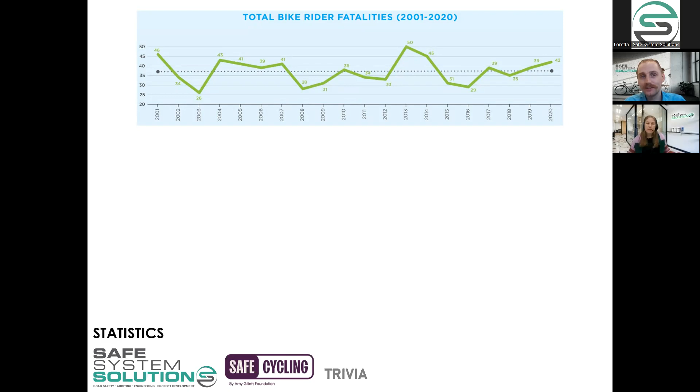I just wanted to share some trauma statistics for riders, so we've got context of the size of the issue. The first graph shows the past 20 years measuring riders who have lost their life on our road network. Although there are some peaks and troughs, this dotted line represents the gradient, or where things are heading. You can see it's relatively flat, so we're not seeing a trend line.

Thank you very much, David, that's exactly what I was after. Prize to David, the trend line is relatively flat. It's indicating we're not really heading in the direction we would like, which is obviously aiming towards zero, trying to ensure we're reducing those figures. It's more or less hovering around 40 cyclists per year killed on our transport network across Australia.

If we do a bit more analysis and compare that to cycling volumes per capita, relative to the population at that specific period, we do see the trend line showing a little bit more of a downward trend. However, we're not achieving the same benefit as we're seeing with vehicle fatalities.

Another way you could interpret this is that the changes we've made on the transport network appear to be doing good things for reducing fatalities for those in vehicles, and to a lesser extent we're helping our cycling community. So we're not at the same level of reduction for both modes, and there is more work to be done within the cycling area.

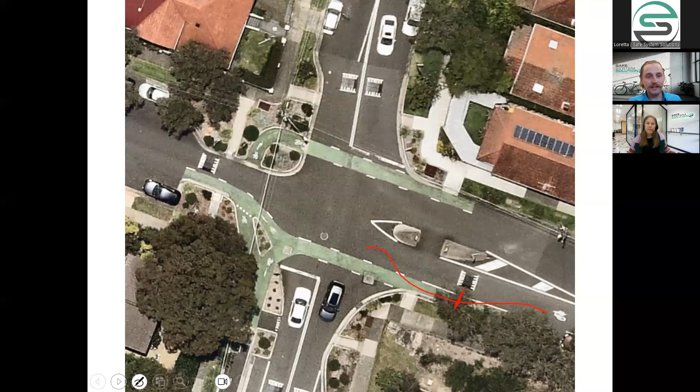Okay, we'll get stuck into some content now. And today's focus is all going to be on roundabouts.

We could have included the roundabouts discussion as part of our previous module, because that was intersections, and a roundabout is an intersection form. But we've deliberately decided to make this its own separate module because there are very specific concerns and risks associated with roundabouts that are really worth exploring, and we want to make sure everyone is comfortable and acknowledges what those risks are.

So we're going through all different types of roundabouts today. There's no Wally for today, so don't need to be stressed about looking out for Wally. He's not going to pop up in today's slides, but we will have an assignment. I'll go through that coursework at the end of the module, but you don't need to worry about our friend Wally for today.

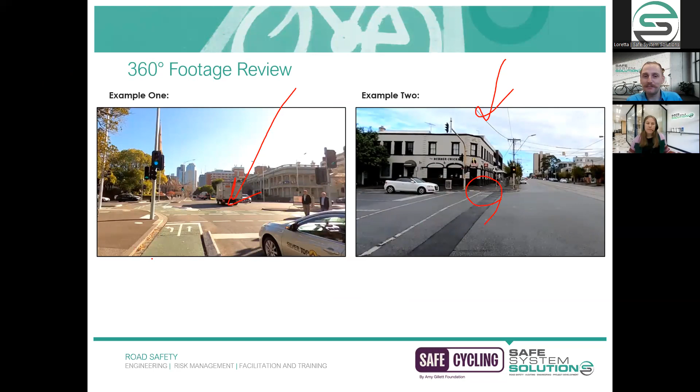We provided two different examples here of intersections and riding through intersections and performing right turn movements. In example one, you would have had an experience of riding through the protected intersection, and example two, just a more conventional intersection, although it does feature those hook turn boxes. Hopefully you managed to have a look at both of those examples, and we'd love to hear your feedback in the chat. If you did feel that safety benefit associated with the protected intersection, we'd love to hear your thoughts on it.

We are going to have a very similar agenda as what we did with the intersections, where we're going to talk about this idea of a protected roundabout. Previously it was protected intersections, now it's protected roundabouts. We'll talk about exactly what the design features are associated with the protected roundabout. We'll look at some international examples, then focus on something a bit closer to home and have a look at Melbourne's protected roundabout. Then we will have a chat through, well, what about multi-lane roundabouts? Because protected roundabouts are generally installed with single lane approaches, single lane in the circulatory area, so how do we manage cycling connectivity and safety within multi-lane roundabouts? And finally, we'll have a chat about local roundabouts as well.

Although this document is a little bit old now, 2016, Vic Roads, or Department of Transport and Planning, have produced quite a good tool within this space, which is the guidance on bicycle and pedestrian treatments at roundabouts. Other jurisdictions have similar papers, but we will be referring to that as part of today's discussion. Similarly, Austroads have also produced their own research report, which is bicycle safety at roundabouts.

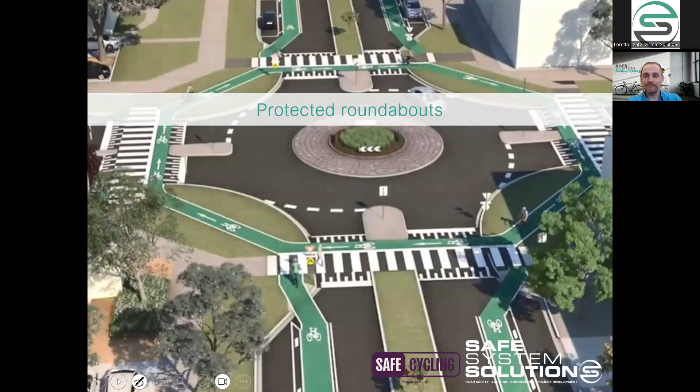So protected roundabouts look something like this. This is an artistic rendition of Melbourne's protected roundabout. We'll go into all the features in a few moments' time, but what I'd first like you to just comprehend at this stage is we're not forcing riders into the circulating area. The circulating area is just where vehicles travel, that's the part of the carriageway, the round part. We're not bringing riders into that space because it's very, very hard to be able to manage that interaction safely unless it's very, very low speeds.

So this is an example of Melbourne's protected roundabouts, and riders are instead offered the opportunity to basically have an off-road facility that passes adjacent to that circulating area. So they don't need to worry about going into that area at all, and they've got their own separate facility. What's also really exciting about Melbourne's edition is all of the conflict point areas on each leg are raised up. I've already spoken to why we like those raised features so much, because they really highlight that this is a priority crossing for pedestrians and for riders.

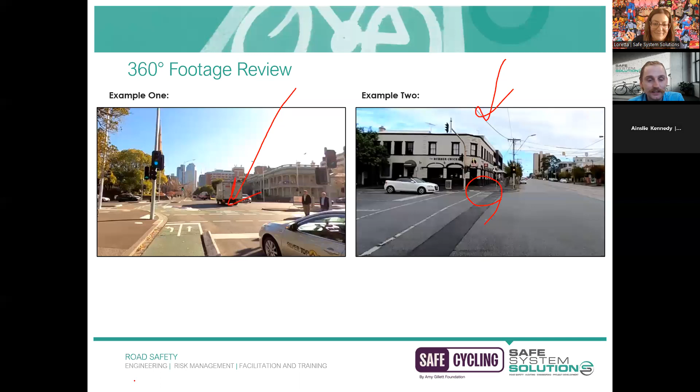Oh yes, okay, thank you very much Loretta, and thank you for sharing in the chat. We'll give a prize out there. Well spotted, there was a vehicle mounting the curb.

That occurred as we were conducting the video for module 3. If you haven't seen it, make sure you're not just watching the presenter, turn the camera around and have a look at how traffic is interacting. It's not an uncommon thing to occur, and in a perfect world you would have those incidents really minimized.

I can say that this feature has been struck multiple times, both by turning vehicles and by riders. There was an incident where a rider just thought this was a conventional intersection, wanted to go straight through, but did collide with the corner refuge island and broke their arm.

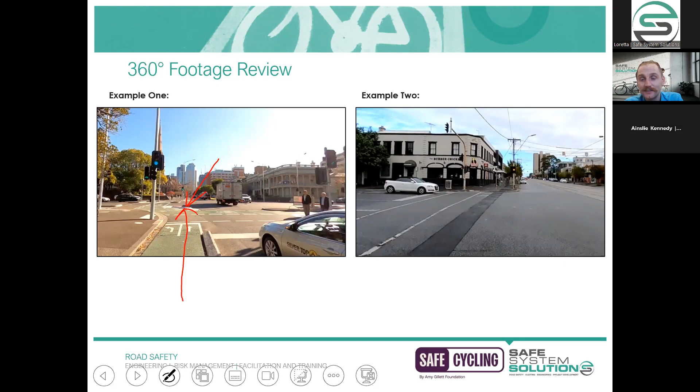The immediate response to mitigate that risk was to install the RRPMs, raised reflective pavement markers, or the cat's eyes. They were just glued on there, half a dozen or so, just to help raise that awareness, because it kind of blends in with the surrounding area.

But it's just one of those things where, in a perfect world, you'd make it as contrasting as possible to really delineate that this is a raised feature and not to collide with that.

The other option would be, and it's probably not always feasible, whether a barrier curb could be installed on the driving side to once again mitigate that risk of entry onto the corner refuge island. But it may not be achievable, given that sometimes it needs to be mountable if you've got heavy vehicles and things like that.

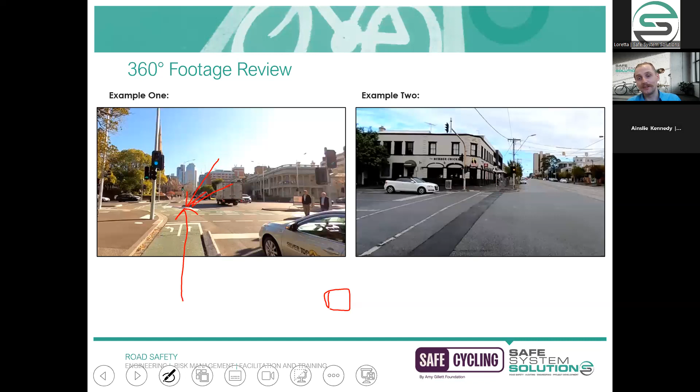So it's a good pickup, and I wish I had a better explanation or solution within that space, but it's more or less part of how these things operate. The takeaway is to try to make it as obvious as possible, and also make sure your lighting is suitable, so in low light conditions it's clearly visible for everyone.

But Loretta, if you don't mind, launching the poll.

In this little diagram, we've got three cyclists within the roundabout. Cyclist A there, cyclist B just adjacent the splitter island, and cyclist C within the roundabout. The question is, which cyclist do you believe is most at risk? We'll give you 30 seconds to fill that out. Final reminder that these polls are not marked or recorded, so they're anonymous. Don't get too stressed if you're not 100% sure, just pop in an answer that you think is correct.

All right, we'll give you five more seconds, so fill in your answer. 3, 2, 1, and we'll end the poll there, and we can share the results.

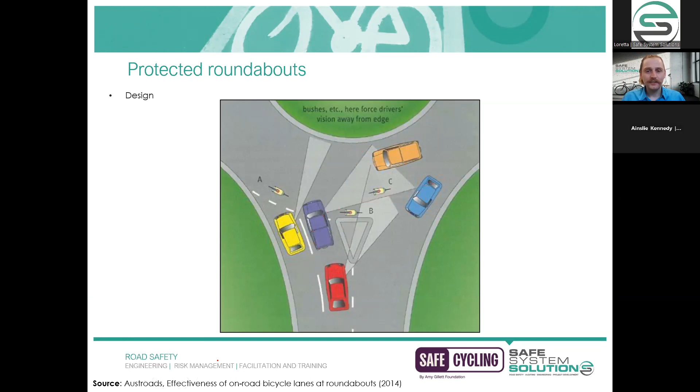And finally, rider C, there's a few areas where this could be an issue. If we go back in time just a moment, you can clearly identify that vehicles exiting could have a conflict point with that rider. But also it comes back to that yellow vehicle decision they may make, where if they see the vehicle adjacent them going, they may go out automatically.

So hypothetically, the purple vehicle stops at the last second because they see rider C and they manage to brake in time. Rider C continues going, but the yellow vehicle has just made the decision, well, I've seen the purple vehicle go, so I'm going to go as well. And that's where you get that collision. So all of them are pretty valid answers and all of them have their risks.

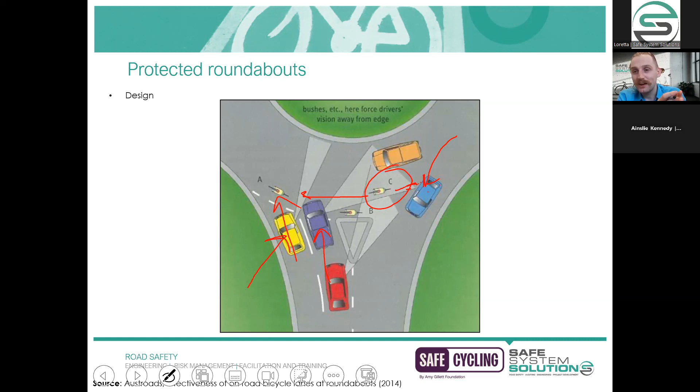And this is a diagram just to highlight that basically every situation of the roundabout, there are pretty significant concerns if you're a rider.

Now, a few years ago, 10 years ago actually now, Austroads had a look at the data for crashes that have occurred between a vehicle and a cyclist within roundabouts. And as part of this analysis, they categorized what are the different crash types or the movements occurring for that collision to have occurred. So I'll just go around the roundabout and chat through what are the most common crash types that we're seeing.

So the red arrow within this diagram, which has got a full line, that represents the vehicle. And then the dotted light green arrow, that is the bike rider. So 68%, which is the majority, is entering motor vehicles versus circulating cyclists. So that's riders that are already within the roundabout and motor vehicles failing to yield to them. It's generally that idea of looking but failing to see. So not giving way to riders who are already within the roundabout was seen as the largest source of trauma for the crash types that were categorized.

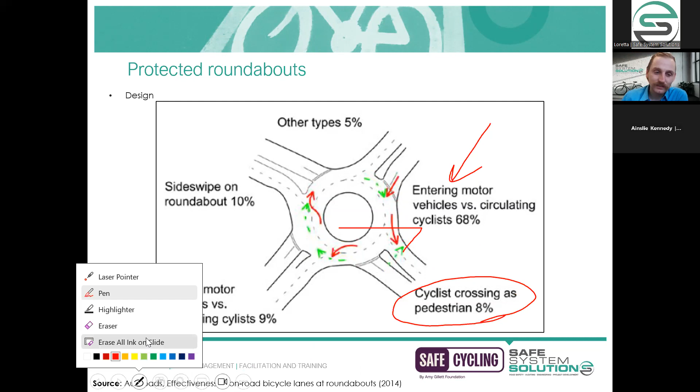If they're crossing in this direction, you can also have issues of sightline obstructions. There could be vegetation and things that's been installed here. And you may not have that ability to be able to see those exiting vehicles as you go to attempt to cross that leg. So it's about 8% that we're seeing there.

This one always catches me by surprise, which is exiting motor vehicles versus circulating cyclists, which is 9%. And the reason I say I'm surprised is because anecdotally, if I were to say what is the most stressful part of the roundabout, it's this collision.

It's if you were riding in a roundabout and let's say you were turning right. Whenever I'm in that position, particularly multi-lane, what I'm most nervous about is that vehicle that's exiting and whether they will recognize me as not going through there, but in fact turning right across the lane. So super, super stressful.

But interestingly, the statistics don't necessarily say that that's the highest level of trauma that's occurring. It's around the 9%, and instead the entering motor vehicles is the highest. So it's also good to have that data to, I guess, limit your bias and your own anecdotal evidence, and instead focus on what does history show us.

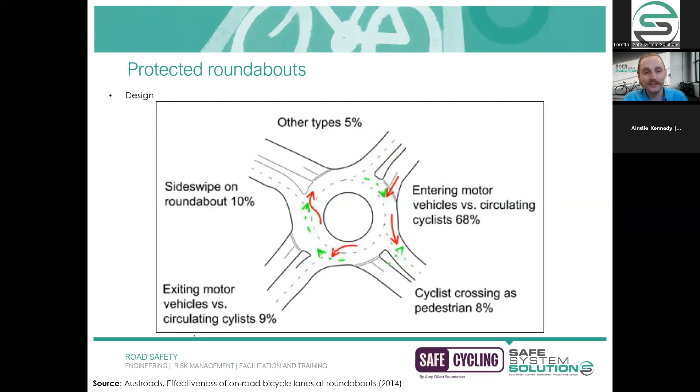So some good lessons to be learned there. The final 10% is sideswipe within the roundabout. It's basically just vehicles straying into the bicycle lane or failing to maintain their traffic lane, and then having that clipping collision with a rider. And then a further 5% which was unidentified because perhaps the collision wasn't quite clear within the police report.

So that is how most of our roundabouts operate. And basically, any which way you look at it, there's going to be risks at the entry legs, the exit legs, the circulating area. So protected roundabouts try and simplify all of that and make it a lot safer for riders.

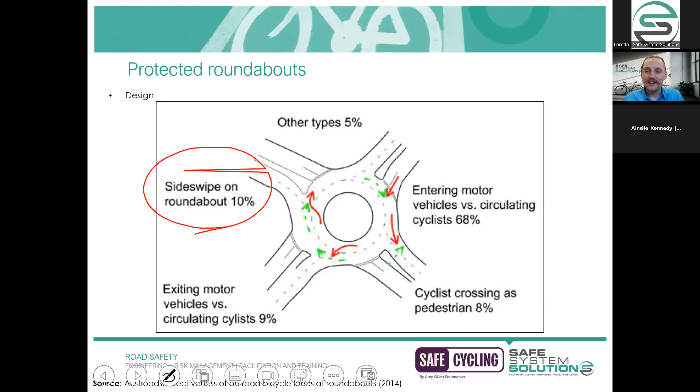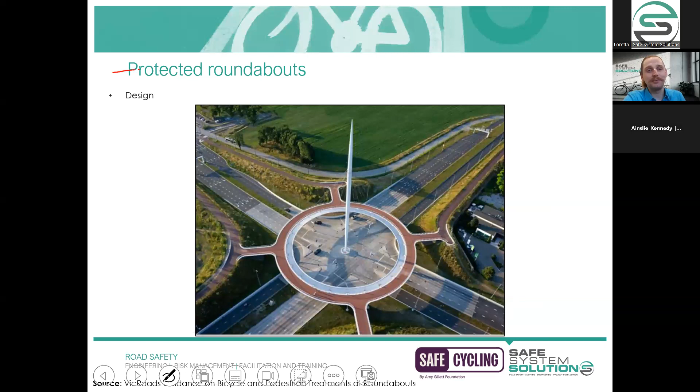Now, this is an example of grade separation. It's not an example of a protected roundabout. It is in the Netherlands, of course. It's called the Hovenring. It's just a reminder that if you're actually doing any high-speed interactions, it's very difficult to manage conflicts with vehicles, because you're just not going to be able to get the impact speeds low enough for those to be survivable.

And it's also pretty unexpected for vehicles in those high-speed environments to be able to yield to any riders. So yeah, anyway, in the Netherlands, they decided, well, we're not going to bother putting riders down there on the carriageway level. We're just going to grade separate. You could also go the other way and tunnel. But yeah, basically, it's not a good idea to just assume that everything can work at grade and it'll be all hunky-dory. Instead, you can look at this as an idea.

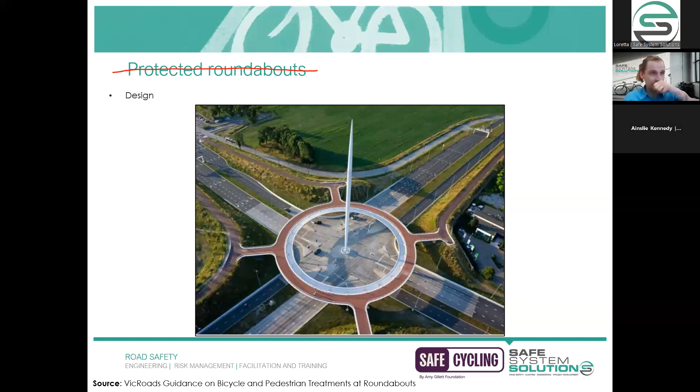That's just another photo of it. So just to confirm, you've got all your vehicle traffic on the carriageway level there, and then all your riders and pedestrians, they get to use this elevated structure, so they don't have to deal with any of that traffic.

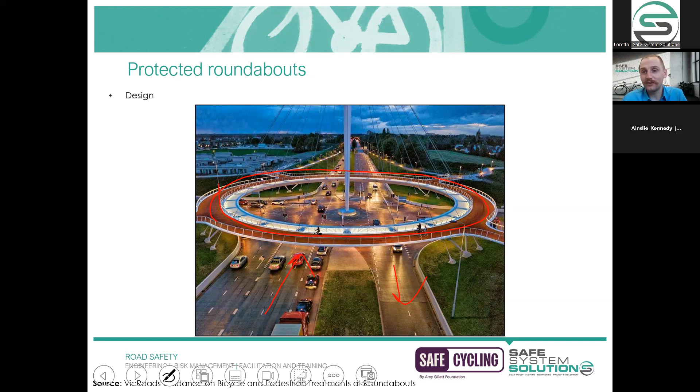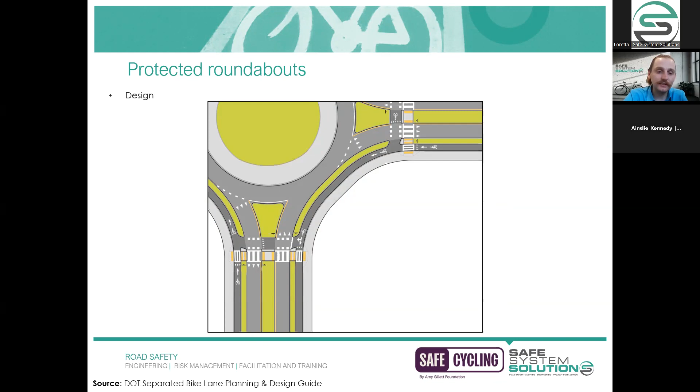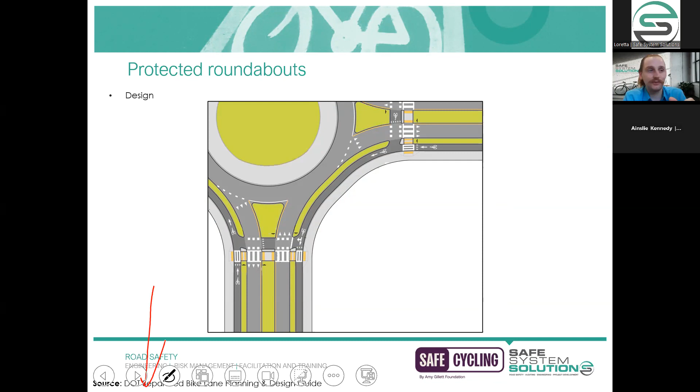All right, we'll have a look at our protected roundabouts now. And once again, the resource that we are using is going to be from an American source. So I've flipped everything over, and there's a few terminology issues that I'm just going to have to translate, because it's just not how we would use certain words or different jargon, but the principles are still very much the same and absolutely transferable. So don't get too concerned about things like that.

So we've got some key features that we need to look out for as part of designing a protected roundabout. And as I alluded to at the start, priority is we're not going to bring riders into the circulating area. Instead, we're going to provide them an offset away from that space so that they don't have to deal with the conflicts close to that circulating area.

So the circulating area there and the conflict point has been offset from there. Okay, so that's really the most critical feature. And figure number 1 is just showing that, yep, we've got a bicycle crossing that's clearly offset from that circulating area. We've got some yield lines, so that's number 2.

Those are the shark's teeth, which is used in North America. It's also used in parts of Europe. We wouldn't use that line marking. We would use give way line marking and also have a give way sign. But that clearly articulates that motorists, you need to slow down and give way as you're exiting or entering this roundabout to pedestrians and to riders. So it's giving that priority to vulnerable road users.

So that's the general premise of what we're looking at for protected roundabouts. I find it's always much easier to talk to actual examples, so we'll have a look at the Netherlands here. This is in Assen, an example of a protected roundabout with quite a large footprint. You can see this is not an urban area, and there happens to be quite a lot of space to play with.

And you're able to achieve quite a large offset. By offset, I just mean where the riders are crossing and where the edge of the circulating area is. I'll keep referring to that as the offset. It's pretty big there. You probably won't be able to get that space requirement in a lot of the sites you'd be looking at, just because in built-up areas we don't have this much land available.

So just to confirm how this works, and the reason we're promoting this: if you're a bike rider riding and you want to turn right, as an example, like this, the first thing is you've got priority across all of those legs. So it's a much more attractive and convenient ride, because you don't have to slow down and stop and give way, then slow down, stop and give way again. It's just a more convenient and easier type of journey.

Here's what it looks like out on the ground.

Ainsley, you got a question? Yes, Max, we have just received a question.

If you have any comments about some of the signage for cars to give way to the cyclists - I know at some of these locations there might be some pedestrian crossing signage. Is there any for cyclists specifically though?

Good question, we'll give a prize out there. And the answer is it's very jurisdiction specific.

So depending on which part of the country you're calling in from, you may do things a little bit differently. Within Victoria here, the way that we would do it is we'd have a give way sign, and then underneath it, a supplementary panel which has just got a symbolic person and a symbolic bicycle - that's pretty bad drawing, but you get the idea. So that's kind of how we manage it in Victoria. Other jurisdictions don't have those panels and they do slightly different things. But probably get in touch with your state road authority for more info on how that could be adequately signed.

Perfect, thank you, Max. Thank you, Ainsley.

Loretta, another question while I've got you. Referring to the previous slide, just out of curiosity, on the left-hand side there's no zebra markings on the bottom left crossing. Any reason for that? I've looked at this site dozens of times and never noticed that. That is very good eyesight. I had no idea why that would be the case, actually. That's very unusual. I don't know why. Really strange - you'd expect all of those legs to have a consistent treatment applied, but there's no zebra there. Is that the photo? No, that isn't the photo, that's a different leg.

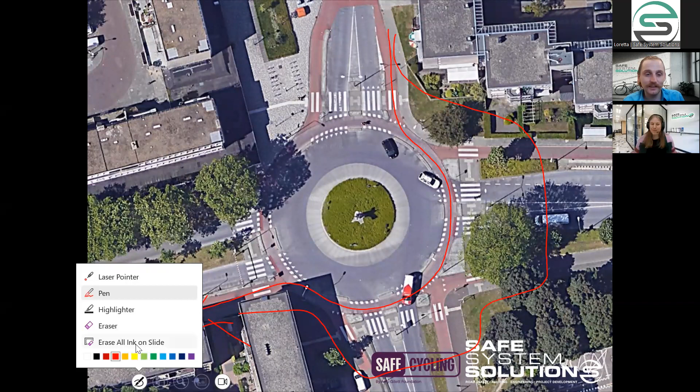However, the limitation we need to be aware of is because we're not achieving that offset, when we have vehicles exiting, they don't really have those sight lines that we like to see. It's actually perfectly illustrated in this aerial image, whereby you can see that white vehicle exiting the roundabout, and you can also see there's a rider within that outer ring. As they're traveling around here, you can appreciate that if you were driving that white vehicle, it's practically impossible for you to see that rider who is on your near side, right behind you - likely not in your wing mirrors and likely not in your rear view mirror. So they're effectively hidden, which is not a great design outcome.

I wanted to provide another example, this one in Fendon Road, Cambridge, in the UK. I like that they've got this outer ring for the riders, similar to our second example, because just having that ring concept, one smooth radius, is a lot more comfortable to ride in. It feels a bit better than having to do lots of little turns.

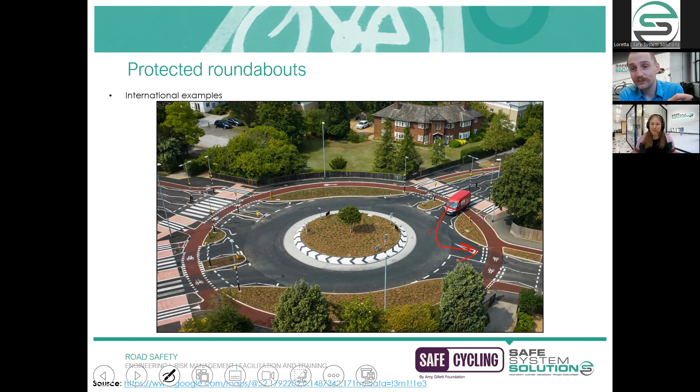But what they've also managed to achieve here is basically a 6 meter wide offset, so one vehicle has the space to stop and yield to any riders or pedestrians crossing without blocking the circulating area. This is what it looks like on the ground, and you can see this motorist has a pretty good sight triangle to see any crossing users. They're not forced to look right around over their shoulder — it's more or less right in front of them, so much more likely to yield.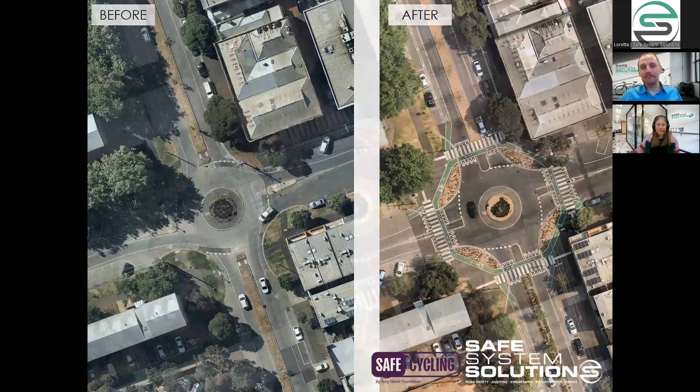I'll throw a question out to the group, so get ready to jot down some answers. The question I have for this specific site, but for others as well - I've talked a lot about the advantages associated with protected roundabouts. Can you think of any disadvantages for bike riders with the installation of protected roundabouts? Pop your ideas into the chat. I'll give you 35 seconds to have a crack at that. If anyone's ridden this facility and wants to share their own thoughts, by all means, you're welcome to provide that anecdotal experience.

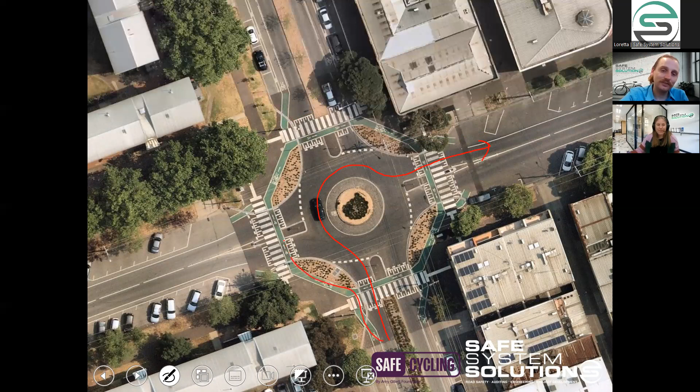But the answer that I can see has popped up quite a few times, and one that I did want to award a prize to, was that it is a longer journey time for riders. I'll take the example of turning right, where this issue is exacerbated. If you were at a conventional roundabout, or previously, what you may be doing to turn right is accessing the circulating area, performing that type of movement. Now instead, using the protected roundabout, you'd be doing something like this. Of course, on an aerial, it looks negligible - why are we complaining about that? But when you're actually riding, just like if you're a pedestrian walking to the shop, you just want to get there as quickly as possible. And if things are in your way, or you have to do a detour, it can become frustrating.

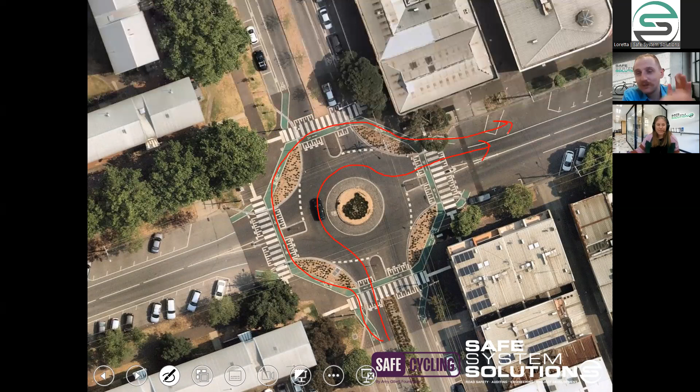So Loretta, we'll give our prize to the third person that mentioned the longer distance or longer travel time for that. I think that's a... Will do. I was going to say there's quite a few that answered that one. So the third person, all good. Thanks, Matt. Number 3, numero 3.

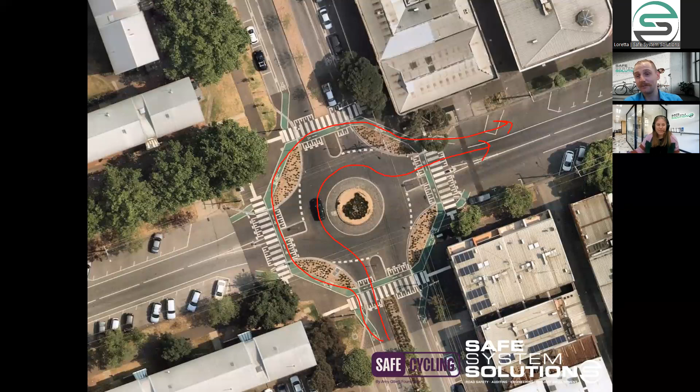Some people think that if we don't have 100% compliance with all riders in the protected roundabout, then there's been a failure within the project. I'm not quite so critical.

We actually did an evaluation of the treatment itself, and part of that evaluation included how many riders are actually using the protected roundabout feature. Our analysis concluded during our site observations that for riders going through, 91% were using the protected roundabout feature. And for riders turning right, 77% were using the circulating area, just like this fellow here, because it's more convenient and quicker. So 77%. Now, as I said, some may have expected 100% compliance, but I don't think that's a realistic goal to achieve.

Instead, some of the key targets of this project were to see higher usage of this as a route, and increased safety outcomes - perception of safety, as well as actual trauma statistics and things like that, which are much more important metrics, rather than trying to get 100% using the protected facility.

If you were in an environment where you really didn't want to encourage the circulating area at all as an option, I've included these photos to show what it looks like as you approach the protected roundabout. As you can see, a stencil with an arrow and text saying 'use bike lane at roundabout' by no means motivates me or anyone else to take that option. It's very easy to ignore and take the route that's most convenient.

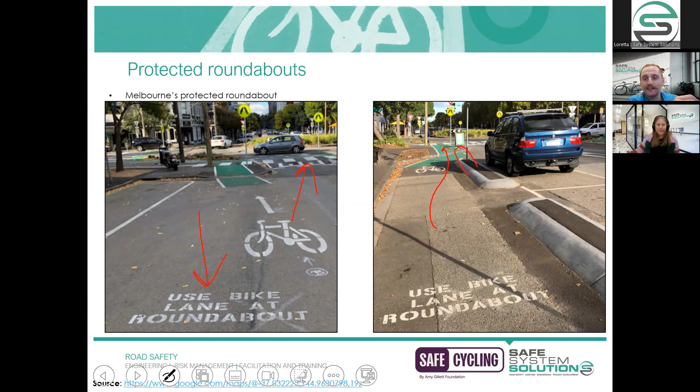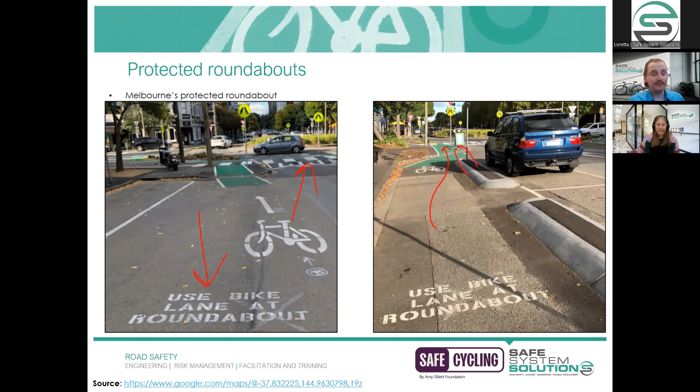Final little session of the module, and then we can get stuck into the assignment, which is exciting. We'll move to our next topic though, which is multi-lane roundabouts. I might just move the banner a little bit so you can have a better look at what's going on here.

Basically, multi-lane roundabouts exacerbate those issues that we've spoken about and also introduce new ones. So one thing I'm going to focus on is, I suppose, the worst case scenario where the issues are probably most prevalent, which is managing right turns in multi-lane roundabouts.

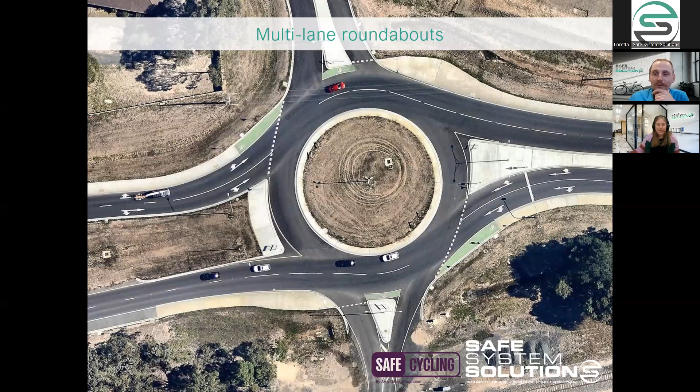In this scenario, just to give some context, we've got an 80km/h road, and we can see that there is some off-road bicycle facility provided. But as you get closer to the give way line, a few things happen. First, it transitions down to carriageway level and also gets smaller - can you see how the width of that facility is not maintained? It's tapering down. This may have occurred because of heavy vehicle swept path analysis, acknowledging that the line marking would represent where that heavy vehicle's rear axles would be. But that has come at the cost of not maintaining the width for the bicycle facility. That's just my first pet peeve.

But considering a rider turning right in this environment, what they may be doing is cycling along here and then entering this space, pausing, turning right, picking a gap within the traffic, heading over there, pausing, picking a gap in traffic, and then continuing their journey. I should clarify, there are no curb ramps or anything in this example that would actually facilitate that movement, but that is an option that could happen for right-turn cyclists.

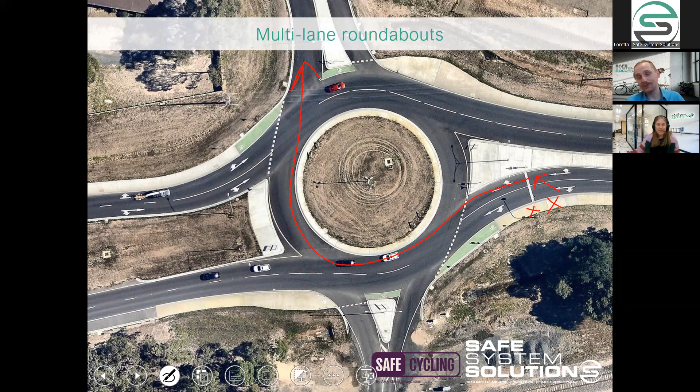So multi-lane roundabouts pose pretty significant risks for riders, and this is one area where grade separation should genuinely be looked at - just being like, you know what, it's very challenging to bring riders through here safely. So let's try to elevate them or bring them underground so we don't have to interact with vehicles in this space. I'll show you some other examples of what could be arranged, but that could be a feasible solution.

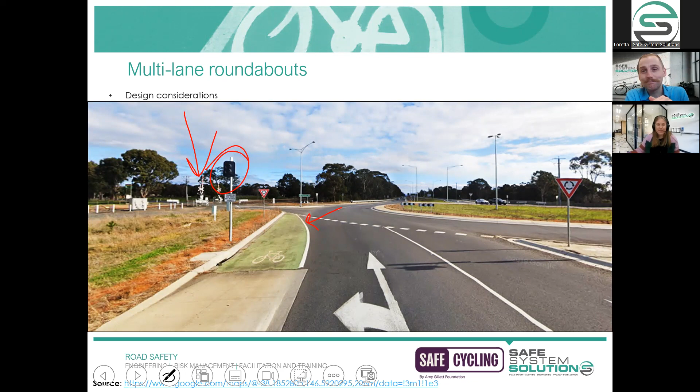So what else could we do in this environment? Well, I've got another example. This one, as you can tell by the configuration, is a very similar layout. This is in Canberra, though, which is like the roundabout capital of Australia, and they thought of it a little bit more sensibly of how to manage cycling journeys through this location.

Let's take you on a journey. We'll focus on the right-hand side. We start on an on-road facility, but as we get closer to the roundabout, we are being transitioned off-road, so we've got a curb and channel there to protect us. Instead of entering the circulating area, we're being dragged away from that. Similar idea to the protected roundabouts, offsetting where the conflict point is being applied here.

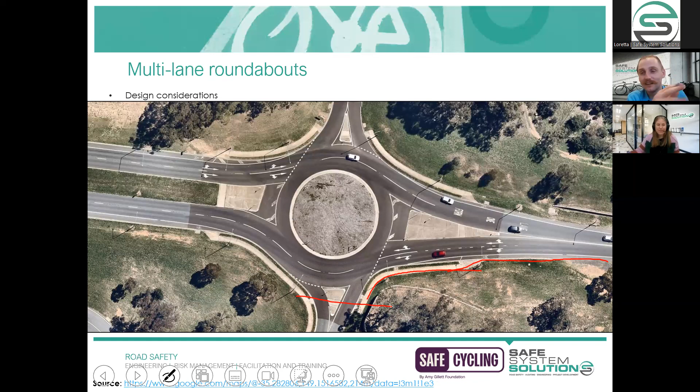The difference here is the priority is still the motorists, because they're going at much higher speeds and it's pretty unreasonable or difficult for you to be able to design it in a way where pedestrian and cyclist connectivity and their priority is going to be understood and assumed and clear. So in these instances where you have high traffic volumes and high speeds, it's pretty unlikely you're going to be able to do an at-grade solution that can maintain priority for bike riders.

And that can be okay, as long as it's clear for all users there. So riders need to be clear that, okay, I'm entering this roundabout and I know I don't have priority here, I need to slow down.

There's a little U-rail, like a hold rail, for riders at the crossing location as well. So for those bike riders that use cleats or clip-ons, they don't have to worry about being unsteady. They can just grab hold of this pole, and then once they've got the gap in traffic, they can cross over there. Similar story if they were going right, grab the hold rail.

When there's a gap, cross over, complete your journey. Is that more circuitous? Yes. Is it more annoying because you've got to stop start? Yes, absolutely, those things are true. But it's just not feasible to suggest at-grade solutions here and award that priority for peds and cyclists, because motorists will just want to get through there and they'll be traveling at speed, and it's incredibly hard for them to slow down. If there's just a give way sign, they're just going to ignore that.

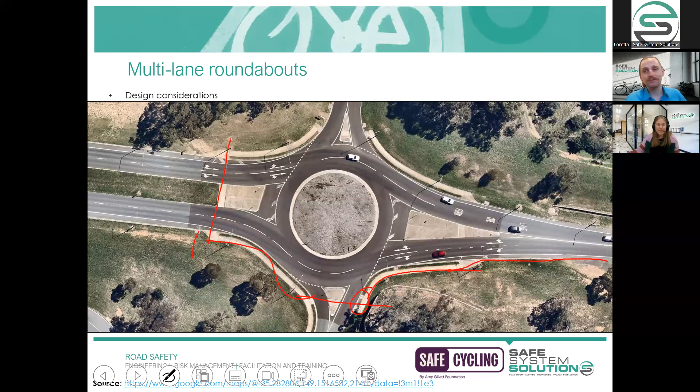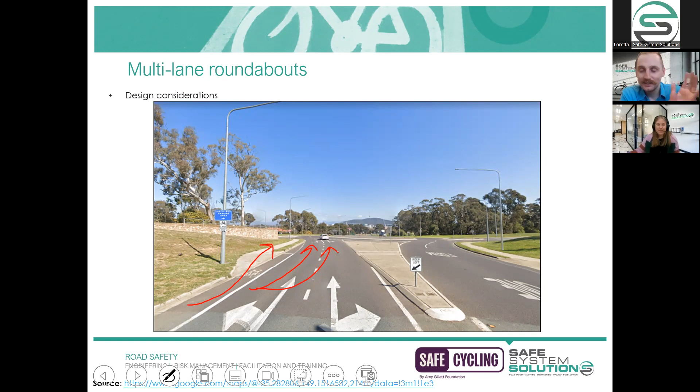We do know that there's plenty of riders that would be like, nah, I'm just going to take the through lane, or I'm going to get over to the right turn traffic lane. And that still is an option. It's not the safest option by any means, but it's not forcing all riders to take that path, because a lot of commuter riders or training riders have absolutely no desire to slow down and give way to traffic and hold the rail and stuff like that. It's just not feasible for them as well. So I actually don't mind having both of those options available, acknowledging that there are still safety risks with this as an option.

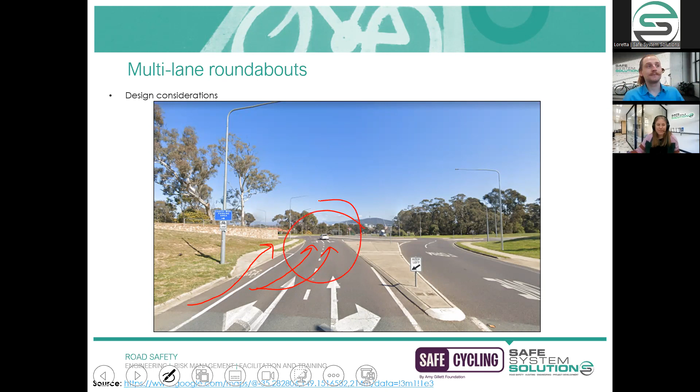For anyone that's got Austroads guides to road design printed out in your office or at home, make sure that if you're using a version that says 2011, you put a big red cross through this diagram, because that has been superseded. It's no longer included within the Austroads guide.

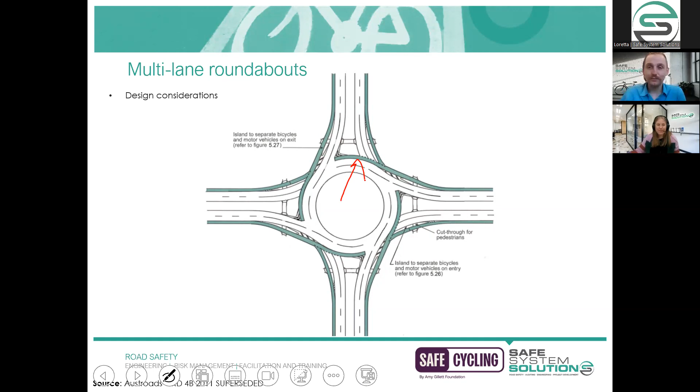This diagram was saying that we're okay to put bicycle lanes on the periphery of multi-lane roundabouts. No, we just don't accept that's a feasible solution at all. It cannot be managed safely, so this one gets a big cross. If you've seen this one before, remember that it's no longer being recommended for practice.

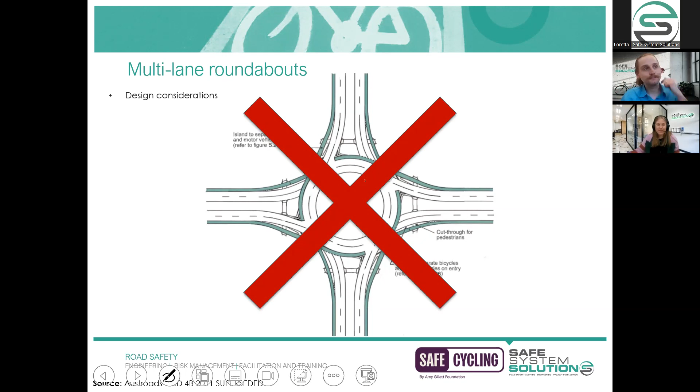Another jazzy concept I like to share at this stage is how we can tie our movement and place classifications to our treatment ideas. For those not familiar with that term, I'll do my best to explain it in the next 30 seconds or so.

It's basically this idea of acknowledging that as a transport network, we've got two main functions. One is the movement of goods and people, a clear function of the transport network. But another function is a place function - somewhere people like to hang out, meet, congregate, go. So a strip shopping center could have a high movement function, as it's important to get traffic through, but it could also have a high place function where the community likes to spend time.

The reason I'm bringing that up is because that lens of different movement functions can help decision makers identify appropriate treatments for their network. As an example, I'll speak through my own assumptions of this concept design: this east-west leg is a divided carriageway, generally only used for high traffic routes, so I'm assuming it's got a high movement function. The north-south legs look like just a connection into a residential community, single lane each way, run-of-the-mill configuration - probably not as much movement function through there.

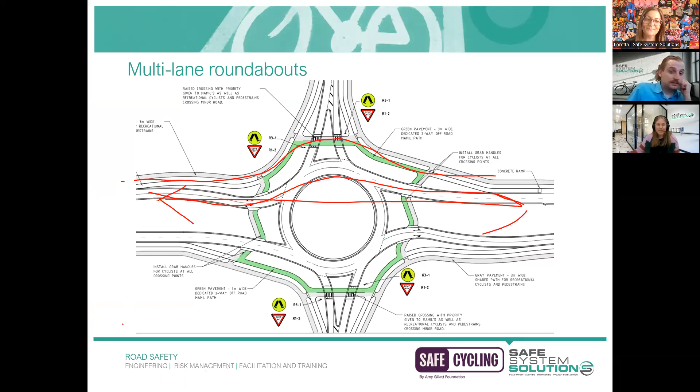It's a great point, absolutely. So this is only concept level, I don't believe it's gone through the functional or any swept path checks. You may need to create a larger offset there just to ensure you're not going to be blocking the circulating area, increasing the risk of rear end crashes and things like that. But this is just meant to be taken at face level, and I think all of that would come out in the more detailed design. Very good point, we'll give a prize out there.

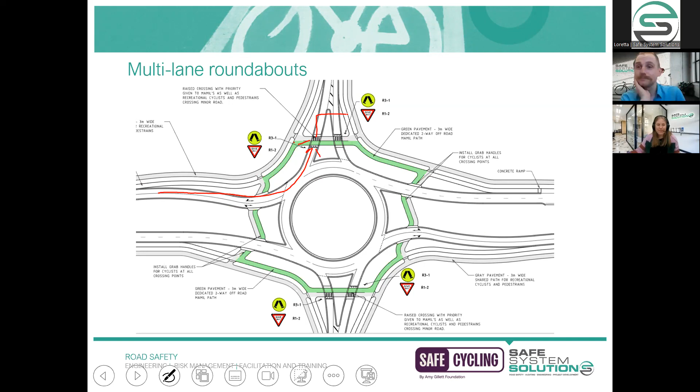Looks like most roundabouts. Let's give a prize out to Sarah. I certainly agree with that.

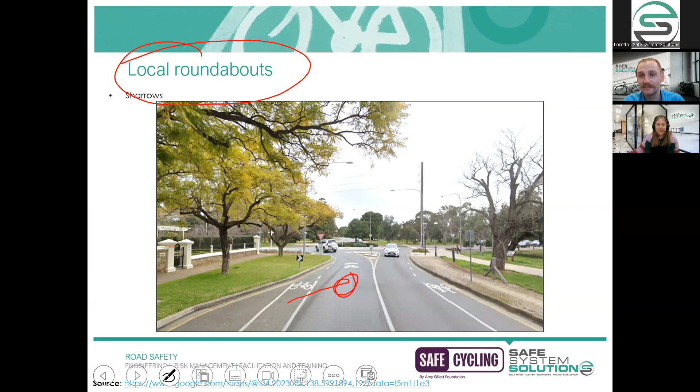Instead, we want riders to take that prime position. But once again, only appropriate where this is a local environment, so we're talking low traffic speeds and low volumes. A couple thousand vehicles a day, the default speed would likely apply. Anything higher than that is just not really going to be suitable for Sharrows.

Another thing that we really like to see, if you are recommending this type of treatment, is supplementing it with local area traffic management treatments - things like speed cushions or speed humps, vertical deflection in particular, really good idea because that is physically going to slow down motorists. In this example, you can see the speed cushion has been installed just prior to where the give way hold line is approaching the roundabout.

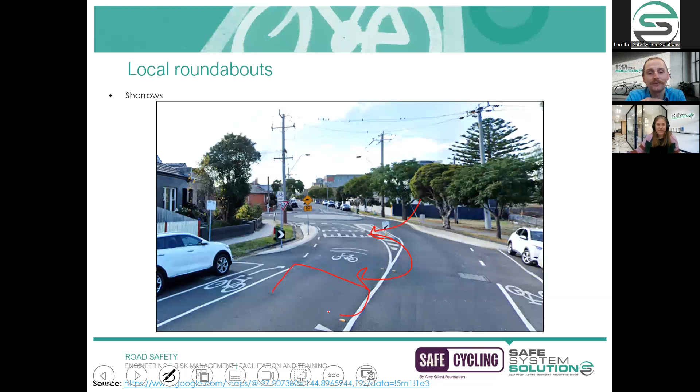We actually think it's a better solution to install this facility prior to the conflict point. In other words, you'd have vehicles slowing down and then riders get the Sharrows, they claim the traffic lane, so you've got the conflict point at reduced speeds. That speed we're kind of looking for is around 30 kilometers per hour. Speed cushions are able to slow vehicles down to that.

So really good idea, if you are proposing Sharrows within your roundabouts, implementing devices like that prior to where that conflict point is. And then you would also implement the Sharrows within the roundabout itself. It's not in this example, but providing them within the roundabout just helps riders recognize where they should position themselves, and gives them confidence that yes, you're okay to ride right in the middle of this traffic lane because we think that's the safest spot in this example.

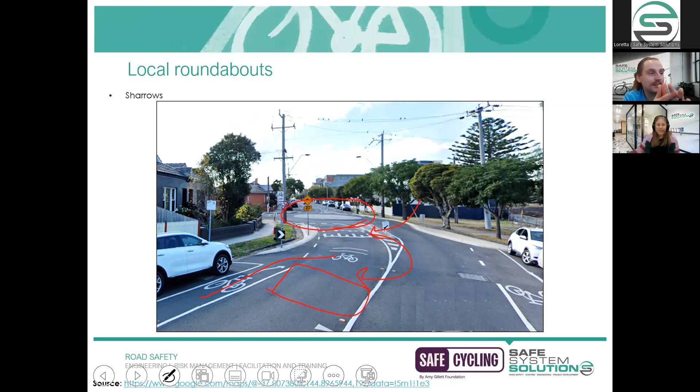Got another example here of sharrows being used approaching a roundabout, and another example of a local area traffic management treatment, vertical deflection being used. Once again, we'd recommend bringing it forward prior to where the conflict point is, just to manage vehicle speeds.

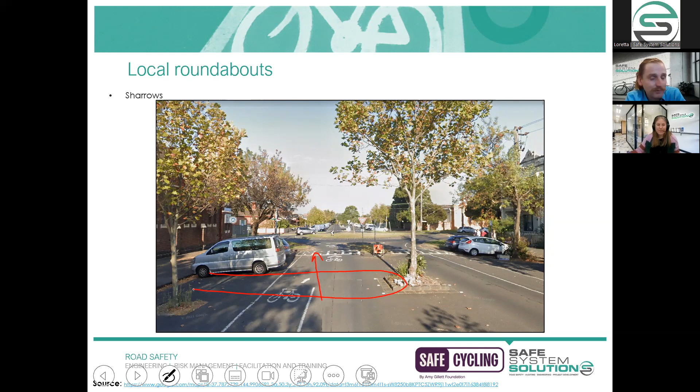Now the next part of this session is to go through some education campaigns, some things we've noted over several years, because engineering is one aspect that can be used to advocate for improved safety for cyclists. However, we also need to acknowledge we're working with humans, so the behavioral element also plays a factor. You might have the greatest facility in place, but does everyone know how to access it? Does everyone know riders are vulnerable in on-road situations? There's a lot to be said about communicating that messaging as well.

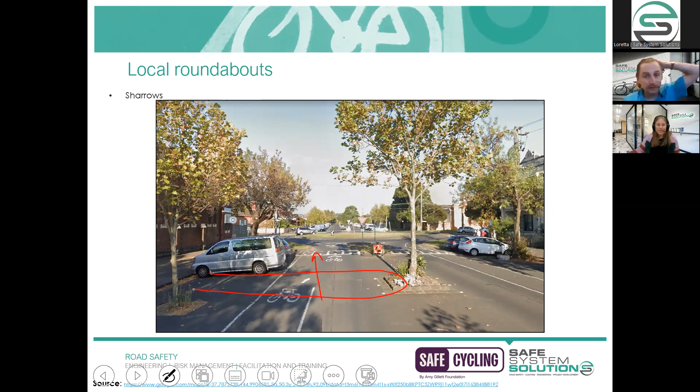So we wanted to share some campaigns installed in various jurisdictions that do a good job of that. While I go through this education campaign component, I'll get Loretta to launch our final poll for the session, a recap of the first question we asked, about how you'd rate your cycling infrastructure knowledge. Same question: how would you rate your level of cycling infrastructure knowledge? Very knowledgeable, aware but don't know much, or not aware. Go through that in your own time and I'll chat through these.

The Red Cup Project happened a few years ago, exploding on Twitter. It was the idea of bicycle users across the world putting red cups at the edge of their bicycle lane. You can see they've been installed there, and then a few hours later, taking a photo at the same location, and invariably you'd see them get crushed because of how regularly motorists use the bicycle lane, tracking into it, not necessarily deliberately, but doing sweeping turning movements or just not staying in their traffic lane. This was a real community-led activism space saying this painted line is not good enough to protect me. It still holds true today that we shouldn't consider just putting down a line marking as separation, because it absolutely is not.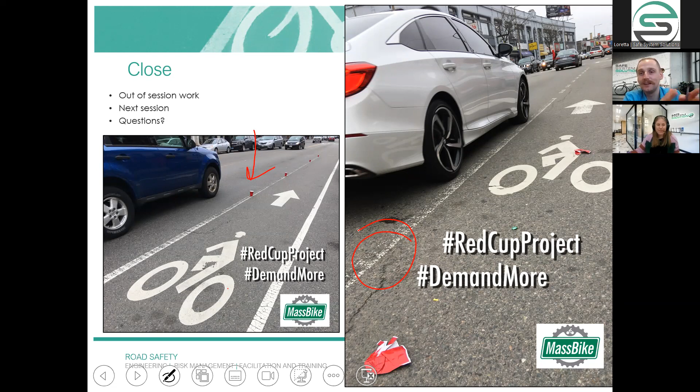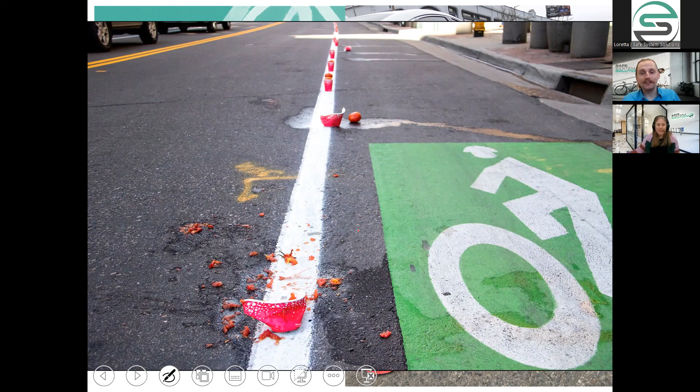There's still the very possibility of vehicles entering that space and colliding with vulnerable road users. Some people also put dramatic things in there, like tomatoes and apples, just to add to the theatrics. But that was a little Twitter campaign that kind of blew up and went trending.

This one I just love to share. It's pretty exciting - this bloke in New York got fed up of asking the council to install protected bicycle lanes, so he decided to go to the local hardware warehouse, bought some plumbing plungers, picked up fifty or so, got some epoxy glue, and just built his own separated, protected bicycle lane. How good is that? You've got to admire the absolute dedication to do that.

Unfortunately the council were not as impressed - they did rip it out, apparently didn't stack up or meet code conditions. And unfortunately, as far as I'm aware, this still remains as a bicycle facility on road with only line marking, not separated. So it didn't quite achieve the goal there, but I certainly like that energy - not that I condone any vandalism or anything like that.

The final one that I'm not going to share now, but you're welcome to watch in your own time, is this advert out of Scotland that was aired several years ago, called See Cyclist Think Horse.

Unfortunately, it was a short-lived campaign because many Scots were writing in to express their dissatisfaction for two reasons. One, that this bicycle rider was not wearing a helmet, which is not a legal requirement in the UK, so it's completely legal, but people were still upset that it conveyed that image. People were also upset that she wasn't riding closer to the curb and channel, that nice bluestone cobbled feeling - like she should be going closer to there.

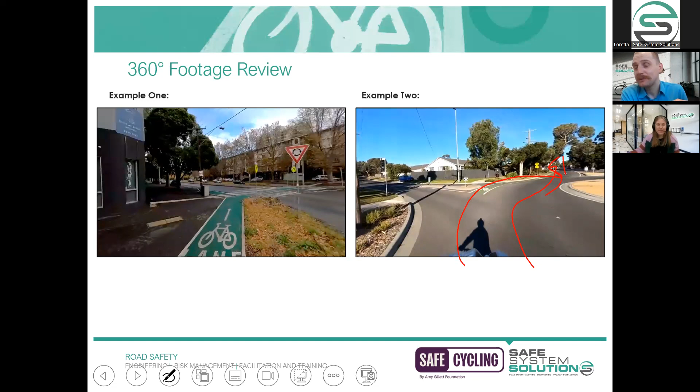Really, really good example of that specific conflict and worth watching. It's also a little bit of a longer video because we've got a third example of where you may not have a protected roundabout on all of the legs - maybe just a certain couple of legs. So make sure you hang around for that.

Now, I've left extra time for today for two reasons. The first being, I want to make sure everyone understands the assignment and fully comprehends what is required next. And also, this is a final opportunity to get live feedback or answer any of your questions about any of the cycling stuff. So use this time now to jot down any questions you may have.

Yeah, just quickly before we jump into the assignment, Max, we had a question in the Q&A which I think will wrap up the course nicely. Do you have any advice on the optimal intersection treatments for cyclists from a safety perspective? For example, protected roundabout versus protected intersection, or local compact roundabout with sharrows versus a traditional giveaway or stop intersection? Great question.

If you're talking optimal, absolutely grade separation. There is absolutely nothing better than not interacting with that traffic and not worrying about it. We've seen superstructures being built in other locations - we've got one in Melbourne currently under construction where you just elevate it above the carriageway and don't need to worry about those intersections at all.

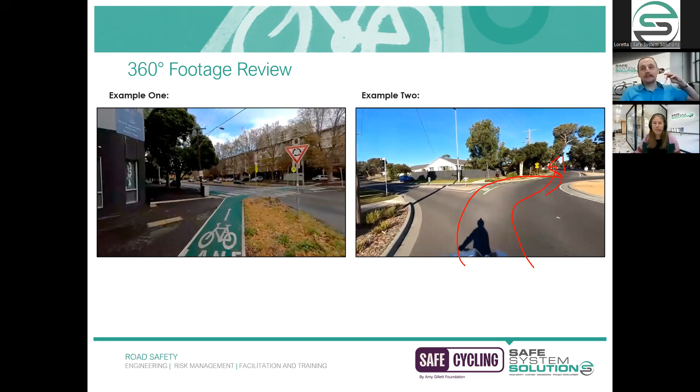Thank you, Loretta. So as mentioned, I did want to provide this time now. Keep the questions coming, but I'm going to spend a good portion just talking through this assignment because there's a few layers and I want to make sure it's all crystal clear for you. So the LMS - I really hope this screen looks familiar by now.

We've got the 360-degree video, already spoke about that one. We've also got this letter to LGA's template - you're welcome to click on that and download it at the moment, I'll speak about it in a second. And we've got a Module 4 assignment, so I'm going to click on the Module 4 assignment and open that one up.

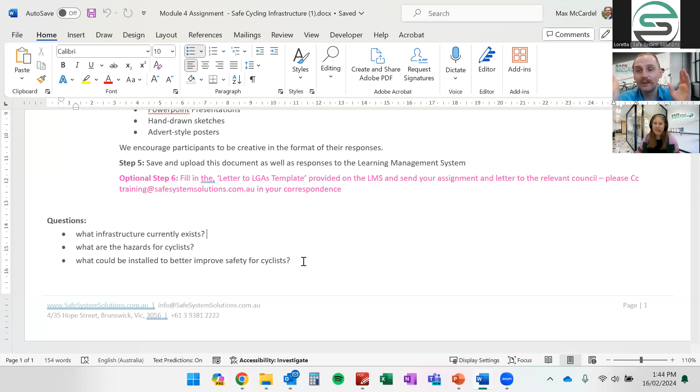The reason we're hammering home this idea of using the right jargon is it's really important when you're speaking with colleagues or peers within industry. If you say protected bicycle lane, you've both got in your head the same idea, so there's no gray area or confusion. You both know what you're talking about then. Those are the questions you need to answer.

Once you have completed that work in whichever format that you like, you can upload the document onto the LMS, similar to what you've done previously. And whoop, I'm done. Within the LMS, you just click on add submission, you drag your file, and then that uploads there.

We have set a due date of next Friday. Now, yes, that is not a lot of time, but the reason we've set that is because we don't want you to spend a lot of time on this. This is not meant to be a thesis or anything like that. We want you to go out there, have a good understanding of what the risks are, write it up in whatever format suits you, and then submit it. If this is taking you days to complete, it's just too long of an activity and not something that we expect of our participants.

So if you do feel like you're getting too much into the detail or spending too much time on it, reach out and we'll be able to guide you through that.

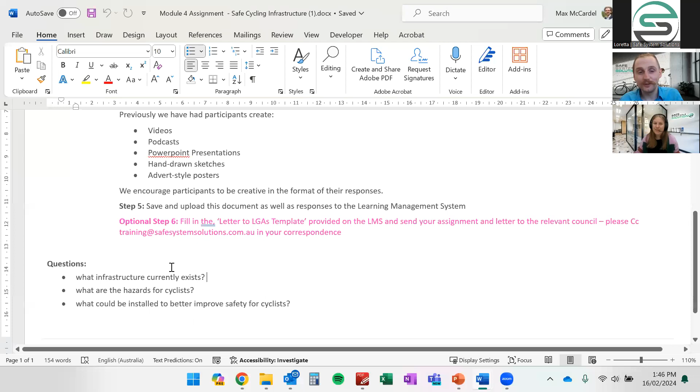Now, the second element of our assignment is optional, but we also wanted to include it. So optional step 6 is fill in the letter to LGA's template, which is provided on the LMS, and send your assignment and letter to the relevant council. Please CC us in your correspondence.

We've had multiple participants in the past who have said, I've gone out on site and I've analyzed these hazards and I've said, these are the things that you can do to improve things. And I'm a bit frustrated that there's nowhere for me to then go on and hopefully deliver some change. So we've provided this as an option for those that want to start to lobby or advocate to our councils or state network that there's some issues out there and we need to be aware of them.

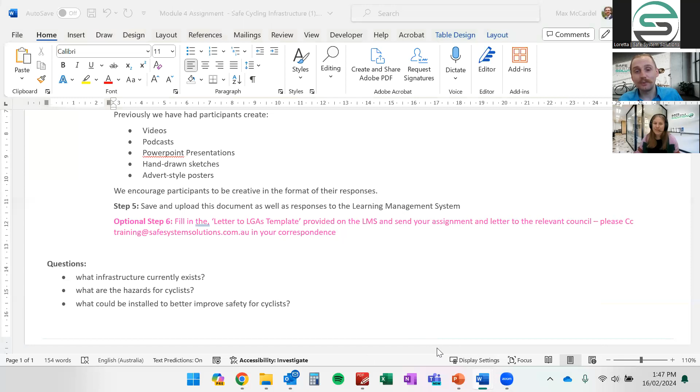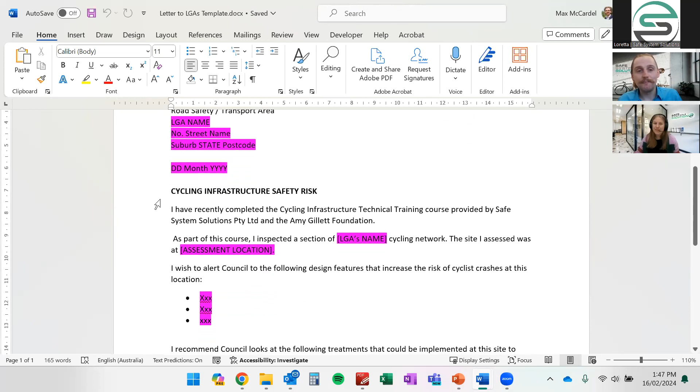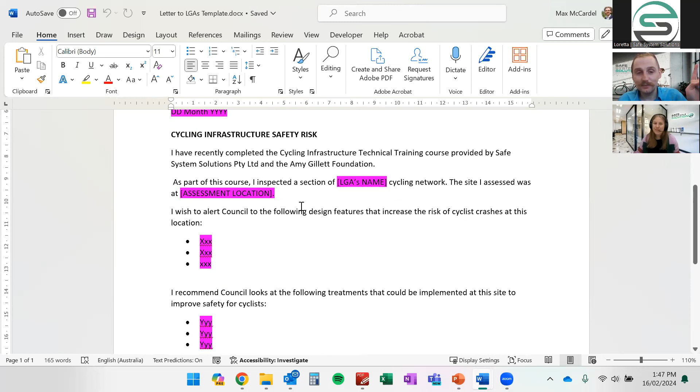So we created a little template. Of course, you can shift things around to suit you. The pink highlighted stuff is what you'll need to fill in. Whichever authority that you're writing to, it could be the minister if you really wanted to. And it's saying, I've recently completed this technical training course. As part of the course, I inspected a section of your jurisdiction. The site that I assessed was at this intersection, as an example. I wish to alert council or whoever to the following design features that increase the risk of cyclist crashes.

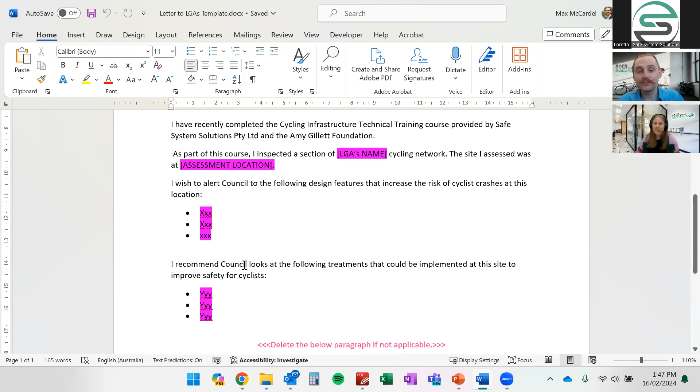And that's where you can just copy and paste from your assignment. I recommend councils look at the following treatments to improve the safety for cyclists. Once again, copy and paste from your assignment. If your site had any BikeSpot comments from members of the public, by all means, include that as a link. But if you don't have any information there, that's also fine. Just delete the paragraph and then sign off on it.

So we've had multiple participants who have emailed their LGA to be like, I've gone out there and done this assessment and I want you to go do something about it, or at least be aware of it. So that's the reason we've included it. It is optional. Some people would probably be writing to themselves because they work for the LGA and they're also going to inspect a site within the LGA. By all means, you can address a letter to yourself. But yeah, it's just for those that really want to get involved in that space.

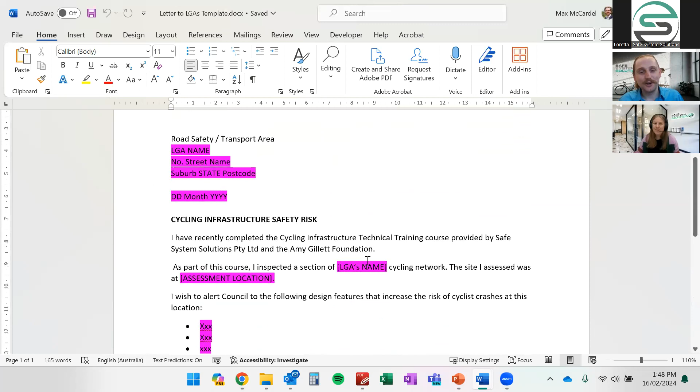So that's the assignment gone through, and I hope all of that was clear.

There's a few other bits and pieces I wanted to get through on the LMS. The first one is under the resources tab. If you click on reference document and resources, you probably already had a bit of a look through here. This is where all the Austroads guides and various papers that I speak about in these sessions are.

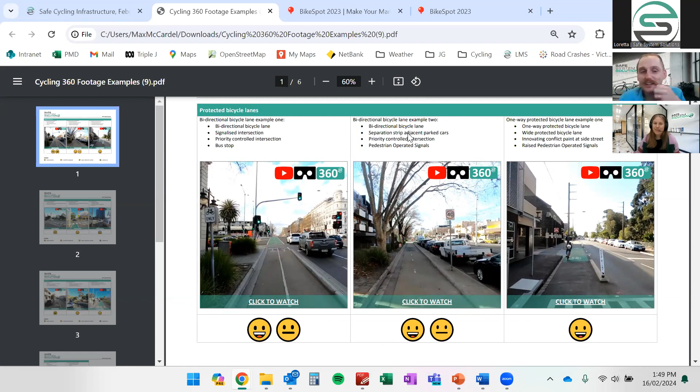But there is this document here called Cycling 360 Footage Examples. And you click on that one there. Open up, there we go. This is basically just a resource for you to have as a reference. So in 6 months' time, when you can't quite remember what a protected bicycle lane is or whatever it is, we've provided this information like a kind of a cheat sheet, so you can just click on whatever these topics are saying. So roundabouts, protected roundabouts, you can click on these examples and it'll take you to a 360-degree video of riding through that facility. We've also given you a little bit of an emoji legend, so you just remember what we would say is best practice and what we do not want to see more of.

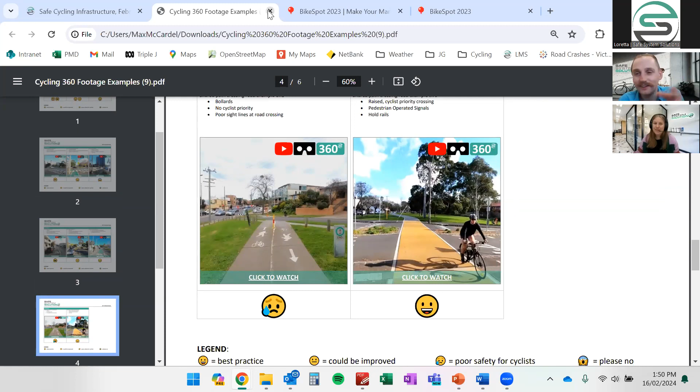If you're going to watch any of them, maybe just watch the ones that say please no, because they're the ones that we definitely don't want to see more of. But just use it as a little reference cheat sheet for you, so in the future you've just got that information at hand. So strongly recommend downloading that, chuck it on your local disk somewhere.

The final thing I'll talk about is how to complete the course and receive your certificate. The first thing you'll need to do is complete our course feedback form, which is a requirement to complete. We take all of that feedback very, very seriously. We're continually developing and tweaking this course to ensure that we're providing the best course that we can. So any suggestions for improvements are very, very welcome.

We also provide people the opportunity to share their achievement online. For those on LinkedIn, for example, we've got little badges, and if you click on here, it will take us to our website, which has different badges you can download. The course you're completing is Safe Cycling Infrastructure for Streets and Roads. If you click on that, you've got these badges which you can use to create a LinkedIn post or whatever social media platform you're on, or just share with your colleagues. I've also given you some template words you might like to use, just saying I've completed this course and why you did this training. Just for those interested in sharing their achievement, we've done the hard work for you, so you don't need to worry about doing any of that yourself.